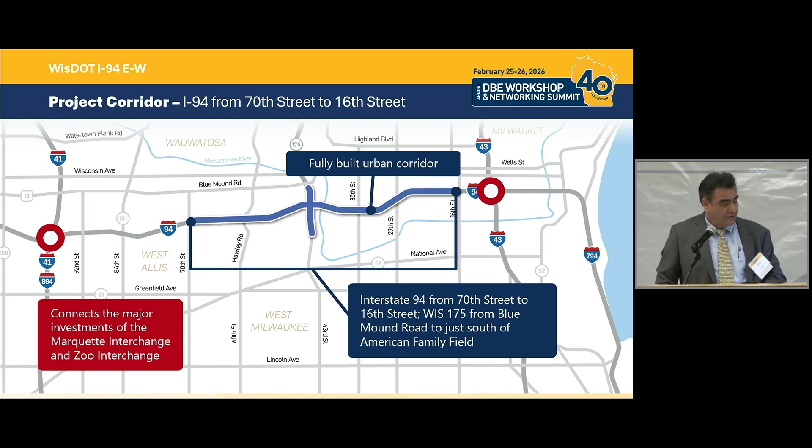Why? Purpose and need, right? COVID slowed us down a little bit, but traffic's back - anywhere between 160 to 180,000 cars. People going to work, back and forth, going to the Brewers game, the Bucks game, and that's one of the reasons for the traffic. And we've got deteriorated pavement - these are vintage 1960 design and construction. We need to get out there, and we need to get out there now.

The safety element I talked about is one of our core values here at the DOT. We have an average crash rate 2 or 3 times higher than the statewide average. So we need to get out there.

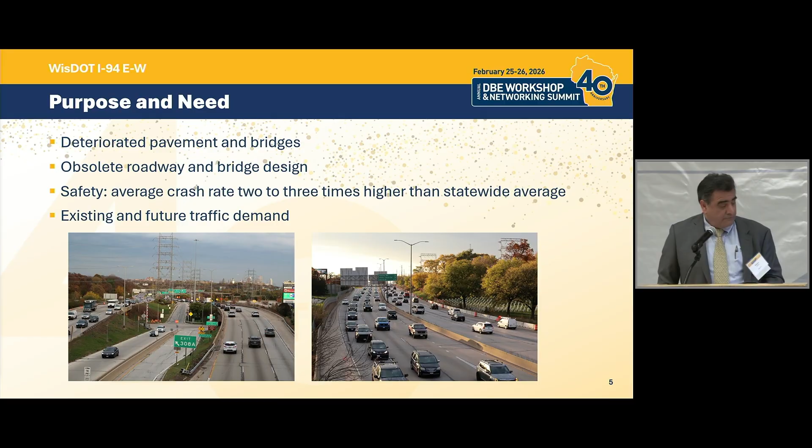I talked about our core value of safety, right? And we've got a successful track record on the mega program down in the southeast. As you can see, the Marquette has seen 32% fewer crashes since it opened up. The Zoo, 27%, and the North-South, over 30%. We expect that same type of success on this project.

A little bit about the timeline - I hear a lot about 7 years. Really? Well, yeah, it's complex. It's really hard to do. You're in a really tight area, and our mantra of keeping downtown open for business is really important to everyone.

Major League Baseball, Major League Basketball, Summerfest, Northwestern Mutual, Milwaukee Tool, all those businesses downtown, and then out to the west in Waukesha and all those businesses. So keeping traffic moving while constructing this is pretty difficult and complex, and that's basically why it's 7 years. It's a pretty big program.

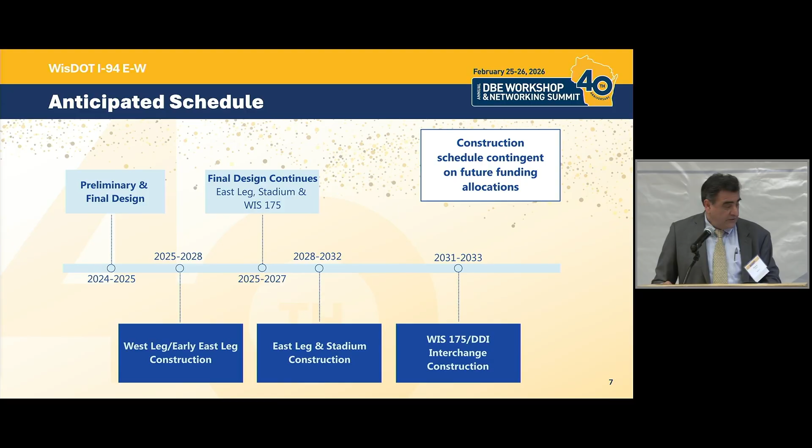This overview is just at a glance, and so what you're looking at is nearly $1.3 billion of construction dollars. The program itself is about $1.8 billion, but the construction element of this project, you can see in the blue, that's our west leg, and that's been let already.

And then toward the east side, we've got the early east leg in the orange. We've got a lot to do, right? We've got the purple, the red, and the yellow, and there's some dates on there, so that takes us out to 2033 for delivery.

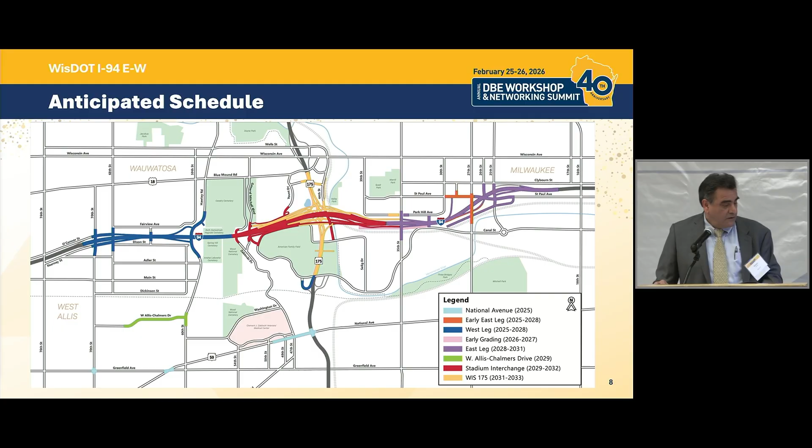So what's next? We let the west leg and the early east leg, but we've got another $750 million worth of work. We've got an early grading project, we've got the east leg itself, we've got the stadium interchange, and then Wisconsin 175 with the new DDI in there.

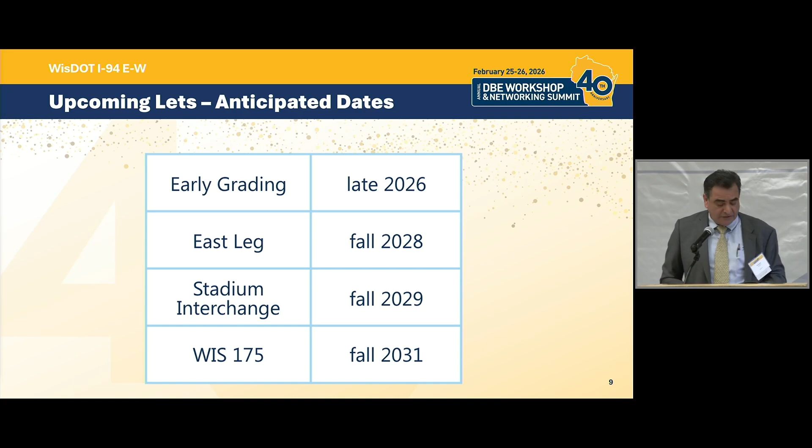A little bit about what are some of the elements and what it's going to look like. There's some pictures of how we've been coordinating with Milwaukee Brewers and Menomonee Valley Partners on some elements.

This is 26th Street and St. Paul. It's a structure, very complex right now. It's what we call a lid. It's very similar to the Mitchell interchange, you probably never even think about it, but you are driving over a structure as you drive through that. So those are some of the design elements.

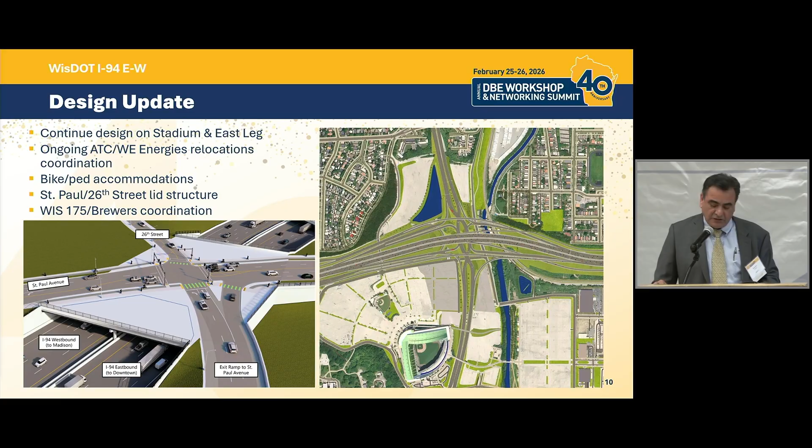Let's talk a little about construction. So the West Leg, what are the key components right now? We're going to be expanding the West Leg to 4 lanes in each direction. We're going to be reconstructing Hawley Road and 70th and 68th Street interchanges.

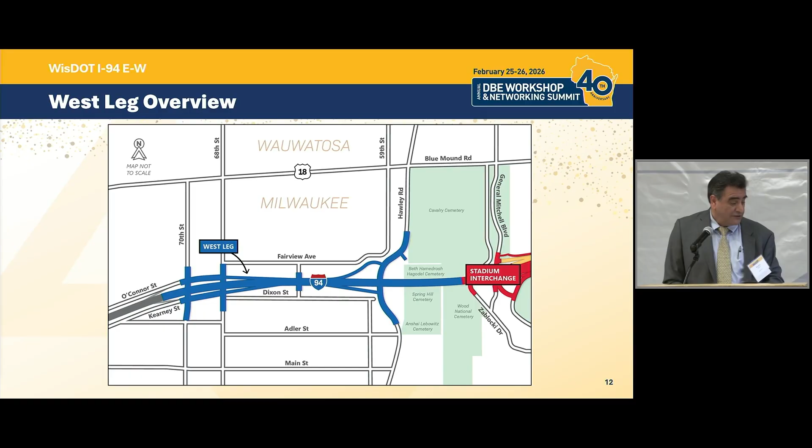Along with that, we've got this little section between several cemeteries, and what our amazing engineers accomplished was to fit this footprint within that and not disturb one grave site, and honor those that are in those areas.

So how do we do that? 11-foot lanes. So for a little bit, for 17 seconds, you'll be driving through that skinnier area. You probably won't even feel it, and then it'll widen out again to full 12-foot lanes with shoulders and everything else.

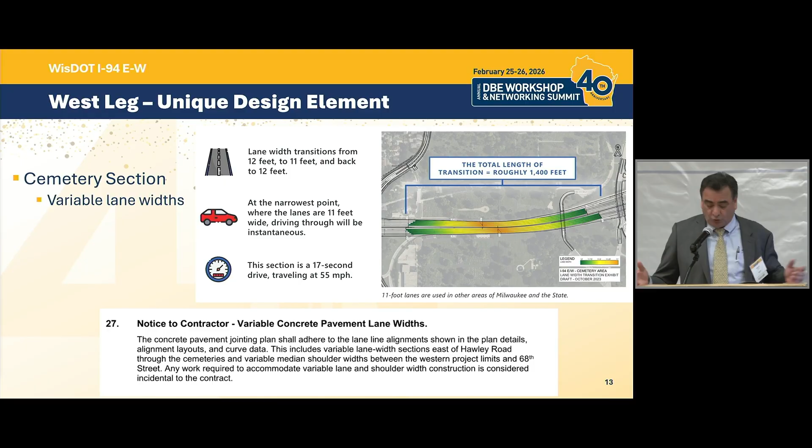So yes, over the winter, we've started construction. You've seen the median crossover work. It's actually been completed, and some of the storm sewer work near the cemetery.

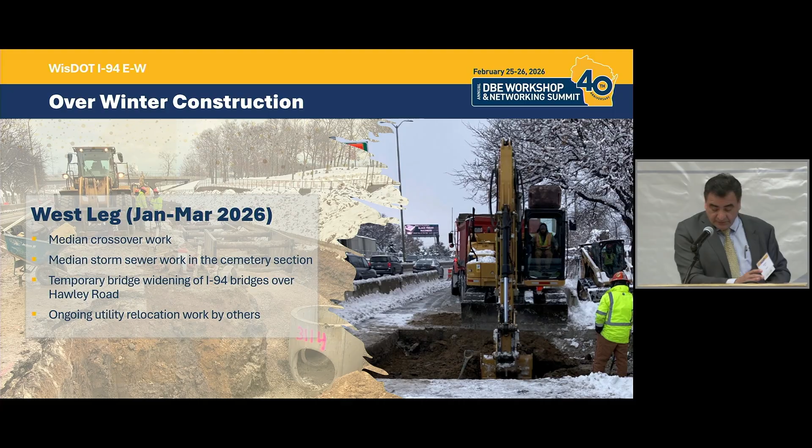On the early east leg, oh let's go back a little bit. So there's some of the median work and things. You can see how tight it is.

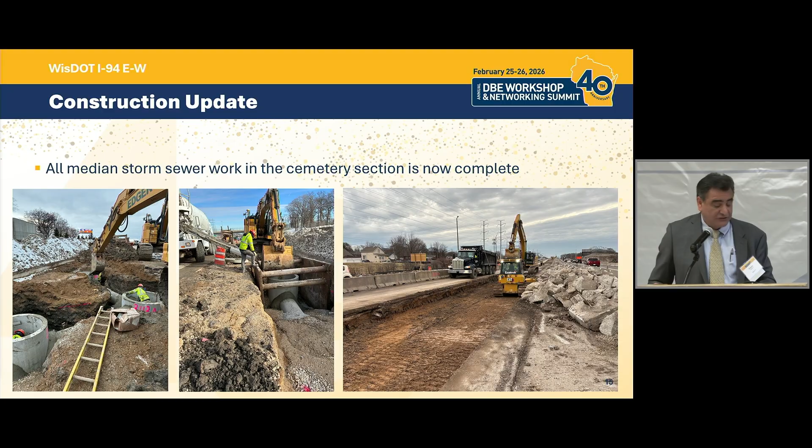Look at that truck, it's just sitting between the grading and the barrier wall. And then on the other side of that is traffic flowing in. It's pretty tight. Kudos to all those that are working out there, and thank you.

The early East Leg project, why are we doing this? So early East Leg project just sets in place some construction for the next stages of the project. It also starts reconstructing 27th Street.

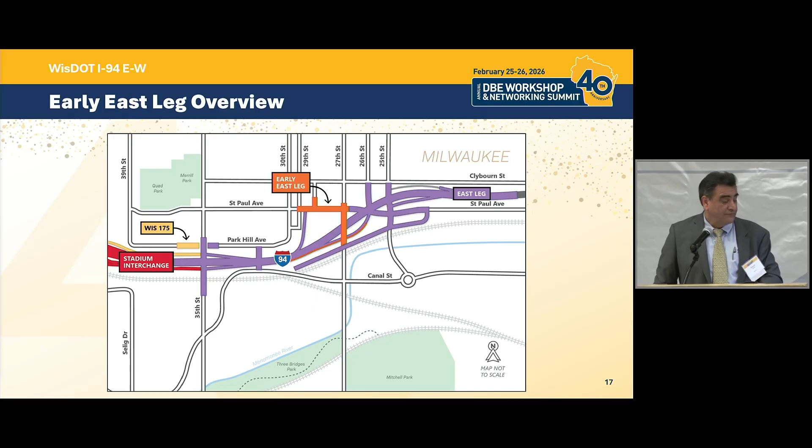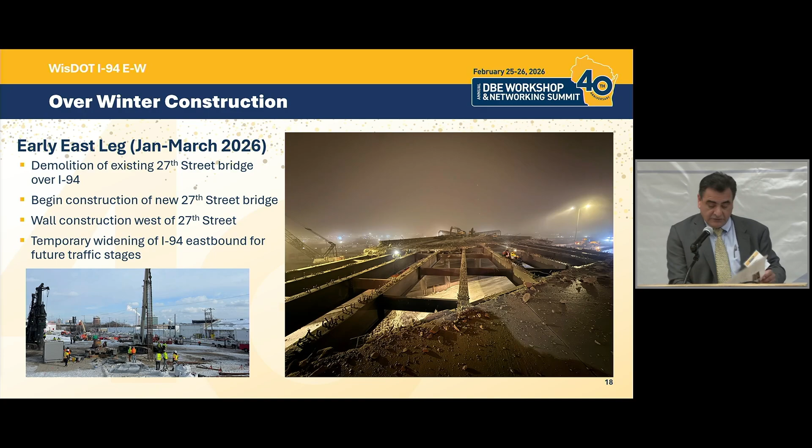So that's closed right now. If you drive or have driven that, those structures are down. We've removed the deck already. If you go on our website, I believe there's a time lapse of that removal. So yeah, it's moving along.

Let's talk a little bit about project communication. So we're trying to over-communicate to both businesses and the public. We don't like surprises, and neither do they. So we've got some champions in that.

Sean over there and Jason Roselle are our media experts, giving interviews to the local stations, Fox 6, CBS 58, and WTMJ Radio 620.

But really look at this. Since September 1st, on Facebook, we've had over 1.7 million views since that date. So friend us, go to our website, use 511 for all your information for this project.

Hey, let's talk about DBEs here and DBE participation on this project.

So our track record on the Zoo Interchange, we had nearly $150 million worth of DBE work on that project alone, and so we have moved forward in providing small business opportunities and DBE opportunities.

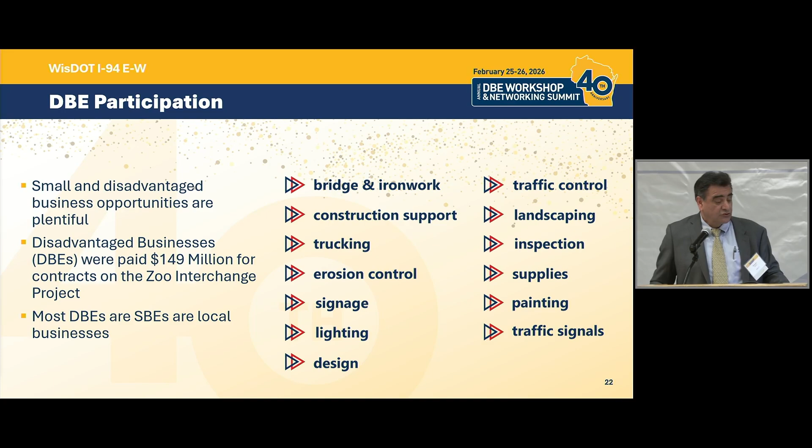Here are just some of the elements on this project that you may consider. Hopefully you have another niche too that you want to work on. Trucking, erosion control, design on the professional service side or construction administration, traffic control, painting are among some of those elements.

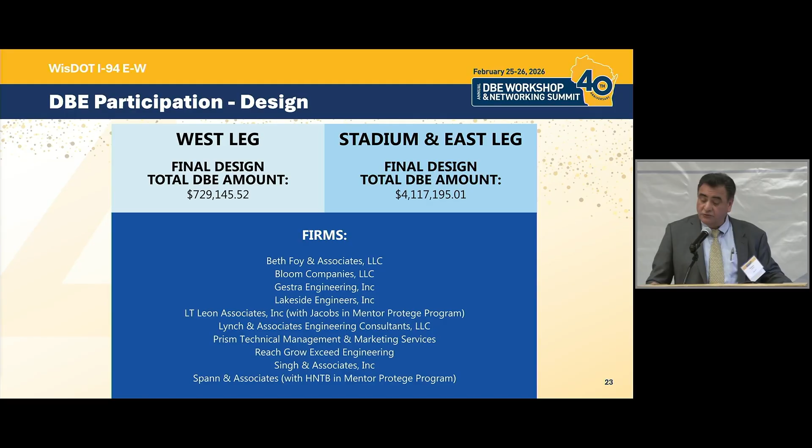And here's some of the firms that have been involved, and some of you are here. I see Matthew over there, and Bloom, and of course Spann, and then our primes, our HNTBs of the world, and others that are helping mentor those DBEs on the design side. So thank you so much for that.

On the construction end of things, the West Leg project is $120 million, with $6.6 million going to DBE. On the construction engineering or construction management side, $3.2 million. On the early East Leg, $4 million, and then construction engineering, another $700,000.

And here's some of the firms that have been helping us through these two projects, so thank you. I know Jeff Reedy from Lakeside is here, so thank you, Jeff.

So yeah, with that, every good director knows his capabilities, so I'm going to ask Jason and Jeff Owen if you want to just come on up here, and if there's any questions from the audience, we'll take a few, right? One or two, if you have any. If you don't, we'll hand it over to Taylor.

Want to handle that one?